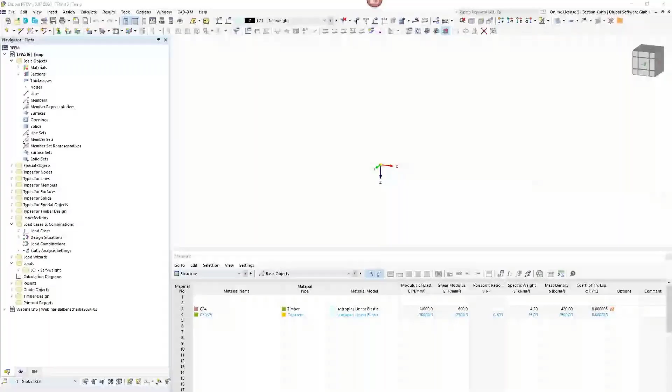Just have to get the right one. This one's right screen. Oh, I have to click share. Sorry. Yeah, looks quite good.

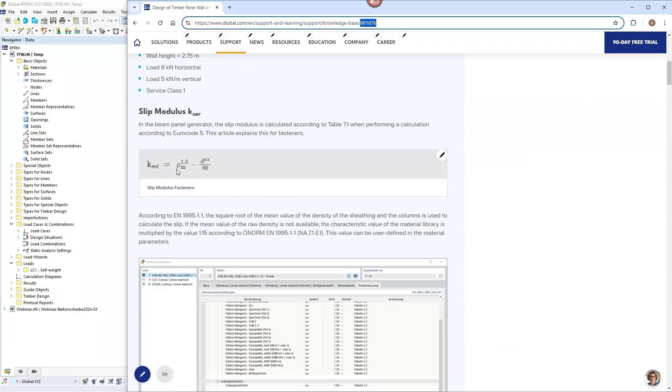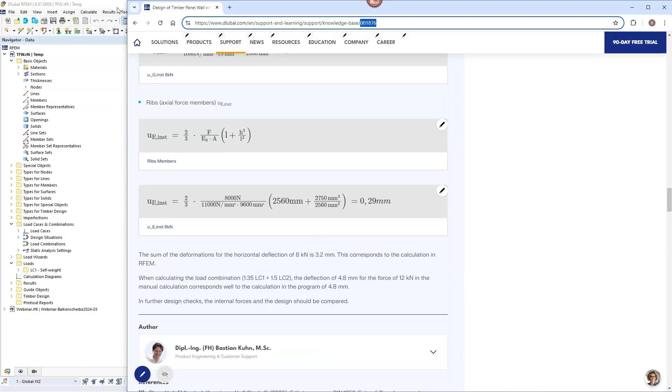Before I start the modeling of this timber frame wall, just as information for you, my colleague will probably share the link also with you. The model I'm doing here has been analyzed and calculated also by hand on our knowledge base. You can find it by the number 001876. There you can see the formulas that are lying behind it, and also the deformation, and of course the inner forces are calculated here with hand formulas or equations. Once I've generated the model, I will take a look back to the homepage just to show you what we are doing here.

Before we create the model, we have to give a model name, timber frame wall. I will choose type of model 3D here.

In RFEM 6, one of the advantages compared to RFEM 5 is that you have every design add-on completely integrated into the software, and it's not a separate add-on anymore. It's completely integrated into the software, which has a lot of advantages for speed and also design purposes.

So I can choose or decide what I want to build or plan here, and what we want to do in this first simple structure. I mentioned it already, we will create a beam panel. Therefore we would need the multi-layer surfaces add-on. We don't need the load wizard. We also don't really need the combination wizard, but it does not matter, and we will do the timber design in the timber design add-on.

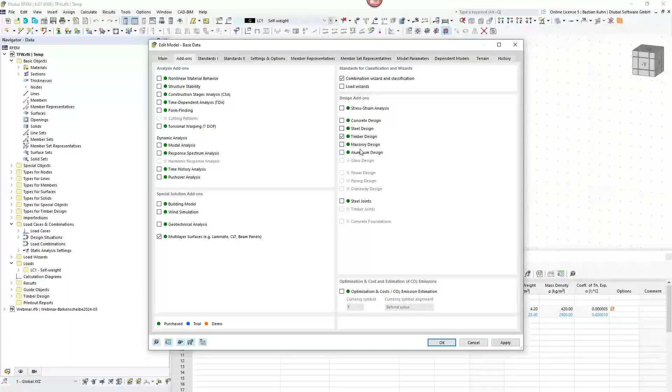Looking for the third register in the basic data, we will have the standards here. We are calculating according to the timber Eurocode, and of course it is also possible to calculate according to the American standard, Canadian, and a whole bunch of others, even Chinese is possible for timber design.

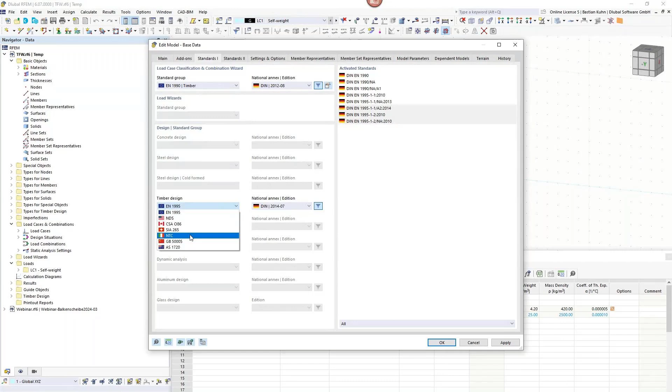I mentioned timber design. We will choose timber design with all the national annexes that are available for Europe, and it is quite similar for what is possible in America, Canada, Switzerland, Italy, because it has some special rules related to Eurocode, but a little bit different. There's also Chinese and Australian standards as well.

Okay, all the other options are not relevant for this quite simple model. We start and we will create the surface or the wall, and therefore we create a new thickness. For starting, similar to when you created a CLT wall or floor, cross-laminated timber, you can start with just a concrete material.

That's what I'm doing here. Any kind of thickness does not really matter, just create it for drawing the structure and how it's going to look like.

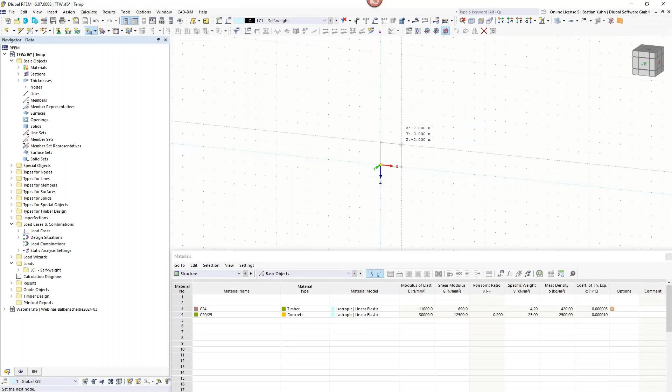So it has a size in X direction of minus 2.56 meters. This is now a theoretical example, and I chose this distance of 2.56 meters.

I can maybe also add a little dimension line just so that you see it here, maybe in the other area.

Of course, for timber frame walls, you have a standard distance of each beam in the panel of 0.625 meters, so 62.5 centimeters, which is the standard design.

In America, with the inches, it's a little bit different, but once again, we're doing this according to Eurocode. I will show how to change it also for the relevant parts of American standard, but the main purpose here is Eurocode. And just to get back to the homepage again.

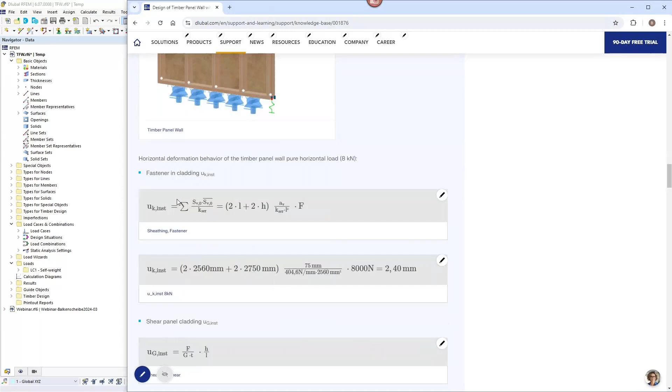Okay, and to see it maybe in this picture, a little bit moving - because of the distance here, I get exactly 5 beams side by side into this structure. Just an explanation in case you asked why I chose such a distance here.

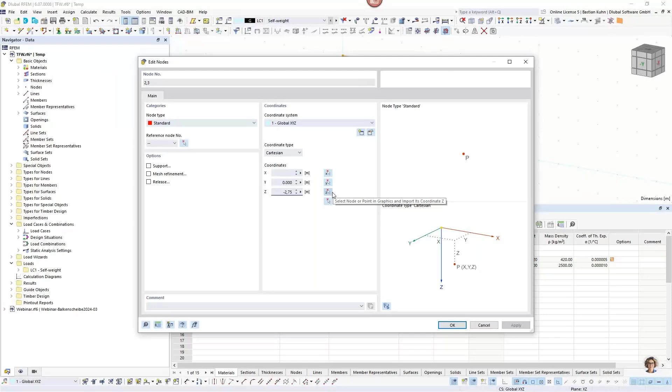Okay, I want the height also to be a more European standard value of minus 2.75.

Then I will add supports in it, and the first support should be not movable in X, Y, and Z direction, and also no turning, because in this case it's a 2D position. I will put that at the origin in order to keep it statically determined.

I will also just move one support on the right side. In the bigger model that I'm going to do just after this simple model, of course, you would do a complete support underneath the wall. That's for sure, it's just for this first example.

So this one is moving, and so that it's not flipping outside of the plane in Y direction, I will define it for the translational degree of freedom in UY direction.

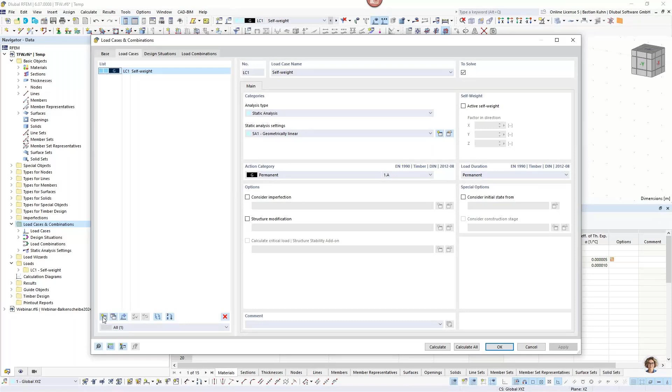Okay, I will put a line load for the first load case with a value of 5 kilonewton per meter, and go to load cases and combinations and create a new load case for the wind. I deactivated the self weight so it can be compared to the calculation by hand.

And here's the wind, and I'm directly assigning a load combination manually. That's what I mentioned at the start, that I don't even need the load combination wizard here, as I'm just typing it for this simple model. Once again, in the bigger example right after this, we use the combination wizard.

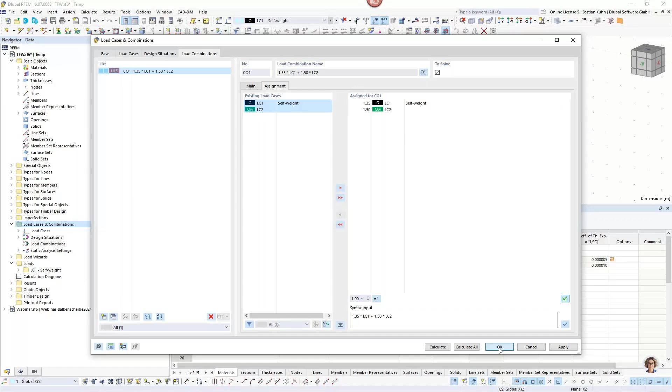Okay, just typed it all, and then it's there. So this is the combination that we are designing.

But of course, I forgot to define the horizontal load from the wind. This is going to be a force of 8 kilonewtons, and it goes in the X direction, minus, of course, because I want it moving this way.

Okay, but so far this is still a concrete wall, which we don't need. And how are we going to change it to a timber frame wall? We double click on the surface.

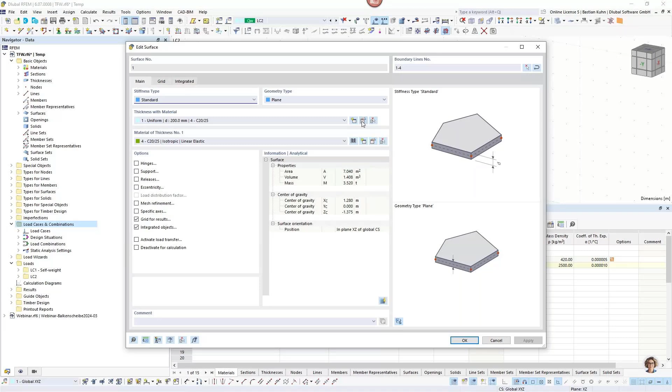And yes, we'll edit or create a new thickness. In this case, I'm choosing to edit this thickness. And now that I've activated the multi-layer add-on, I can choose the layers here.

If maybe I wanted it as a CLT wall, then I would have done it this way. But in this case, we want a beam panel, so that's the thickness type for the timber frame walls.

Not even pure timber frame walls - you will realize it when I'm in the material database via this library book here. So now it's predefined OSB according to either American, Canadian, or European standard.

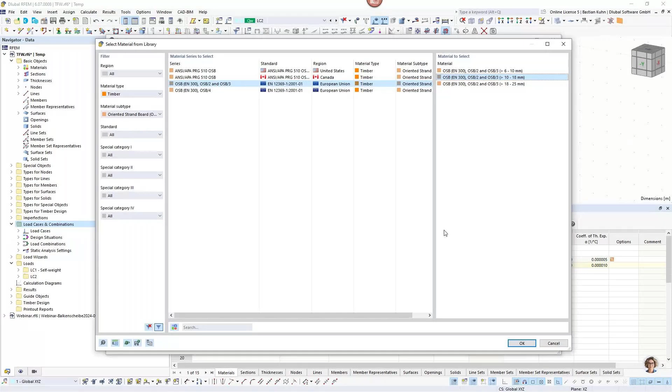For our example, we would use 10 to 18 millimeters OSB. But if you use the drop-down button here, you can also use gypsum, for example.

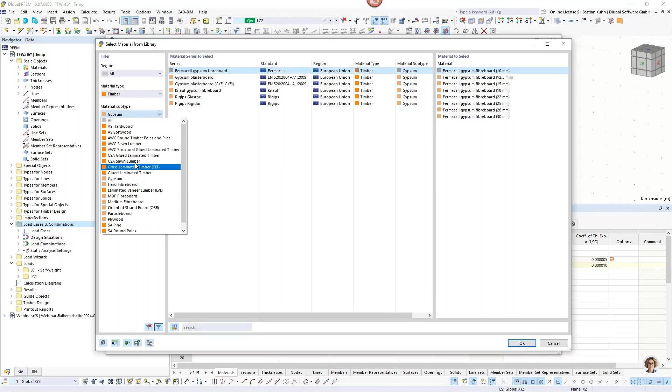Yeah, even for timber floors, at least here in Germany, what's used quite often are the Fermacell gypsum fiberboards in order to stiffen your structure. So that's quite an economic way of creating your walls. I just mentioned it here.

I would choose OSB. I can also show you, just as an imagination, how you would do it with the American standard. It works quite simple, similar to what you choose. I just haven't switched my dimensions to inch, so for me it's rather hard recalculating the 0.5 inch because thickness needs to be defined here additionally.

So this is what we will probably better be choosing by the European standard. We have to change the material into orthotropic for this type of thickness, and I will define 15 millimeter thickness in here. All right, so that's the sheeting.

I also can make the planking from both sides. I can vary it, so it can also be unsymmetric. I can even say the sheeting on the other side is made from a different material than OSB, for example if you are using some insulation material, and this has also some capacities for stiffening out your structure. So this would also be possible to be defined. So the material can be different on the front and back of your beam panel.

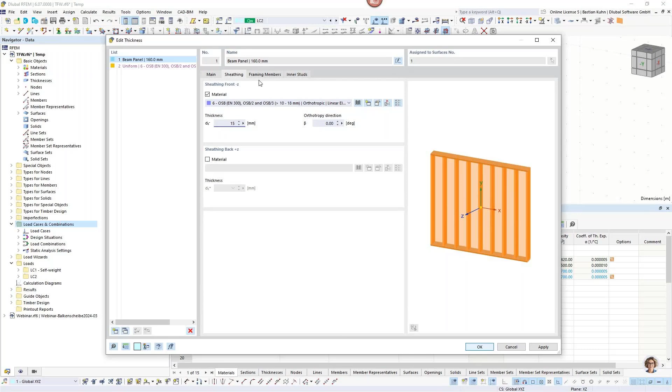Okay, so this leads us to the framing members. Here that's the usual material section database that you can choose here. Sensible, of course, is here only the rectangular one, but just as a notice, it is possible to choose and define any kind of section here.

It's just for this case I'm using a 6 centimeter by 16 centimeter board or beam inside, and this is the most standard way to do it, and that's what I'm going to do for this example. These special selections I will show in the bigger 3D model afterwards.

Then you choose the connection type. You can have nails, staples, or user-defined slip in here. And when we choose staples, for example, with the dimensions of 1.5 by 50 millimeters, you see that the stiffness is already calculated in here. We're choosing a spacing of 75 millimeters.

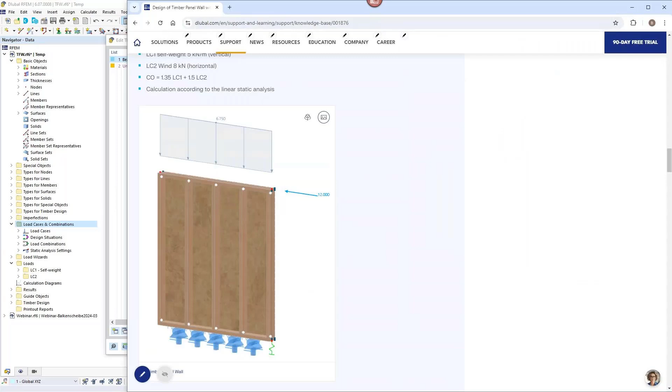And when we compare it, I hope it's the last time I'm switching to the homepage. If you look into this here, you see how this equation, or how these values, are calculated in here, so with the slip modulus from the mean value of the beams and the planking. Okay, so this gives this value.

It would also be possible to consider the connector stiffness just in one direction, so then you have it just in the X direction and the Y direction will be 0. I will also show what that means in the generated beam panel. So that's an important info that you should remember once we've generated the beam panel.

So the point I'm showing you here is this is a generator to generate the timber frame wall in the big program RFEM.

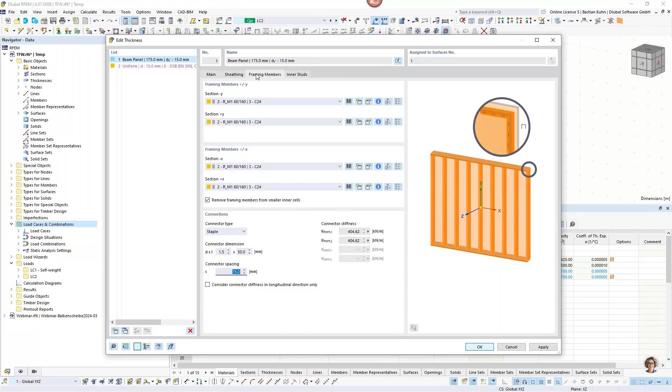Okay, then we have the inner studs in here. Then you can have several, well, you can have other sections in here. That's similar to what I showed you when I was working in the framing members. It counts here vice versa.

You can have here IPE profiles if you want. For example, if you have a very high vertical load and you say, okay, in one special part of it I want an IPE, then you can say create any distance in here, 1000 millimeters for example, and create an IPE.

So that would be possible to also be defined. All right, but here, for this example, we are choosing center to center and the spacing that I already mentioned, 625. This offset and what it makes, I will also show in the bigger model afterwards.

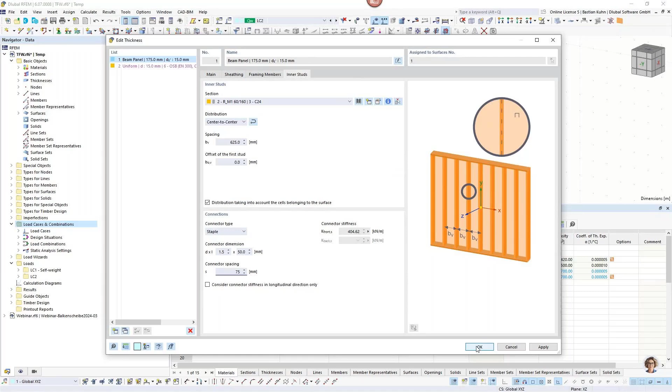Okay, but what I'm choosing, similar to the definition before, is 1.5 and 50 in here, and the connector spacing of 75 millimeters. So then I press OK, and one more time OK. So nothing's changed. Surprise. Why is nothing changing so far?

The answer is because I have not shown the beam panel. What we want, or what our idea is from creating the beam panel, or for developing the beam panel, is that you work with, as you are keen to it, as you know it, with surfaces, and then inside it you generate the beam panel.

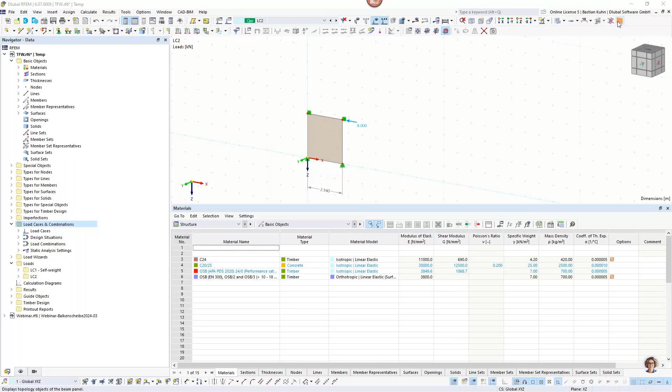And when you now activate the beam panel, you can see that it's generated in here. So here is the beam, top beam and the bottom beam, and also the posts. So we have 5 posts in here, but that's obvious because of our distance. I maybe can switch on photorealistic visibility a little bit, just to give you a better imagination of what it's doing.

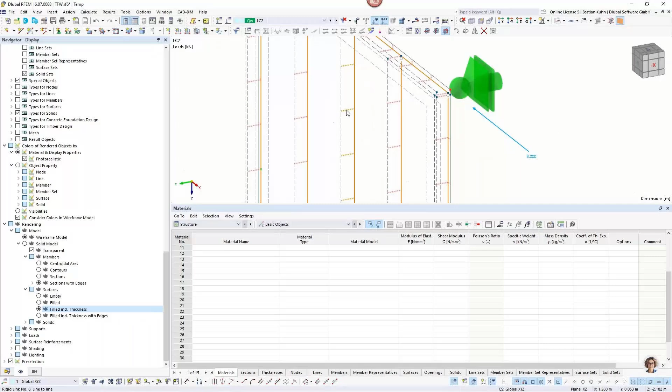I hope that can be seen this way. You see the OSB is eccentric, moved to the outside. It is connected with these little pins in here, which represent the staples that we have in there. When we double click on one of those pins, you can see that there's a rigid link defined, and it contains the stiffness that we generated in the beam panel.

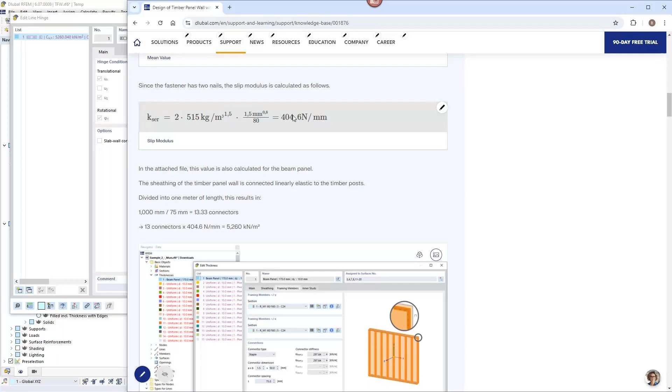I promise not to show the homepage anymore, but I do it just one more time because it's good to have it seen in here. If you remember, I had defined a spacing of 75 millimeters, and this is calculated on 1 meter, which gives you 13 connectors. 13 connectors via the calculated slip modulus gives us this value in here. So this is done here. And I also told you that we should remember this longitudinal stiffness, where if I had chosen just to have the stiffness in UX direction, my UZ value would be 0 in here. So that would also be possible.

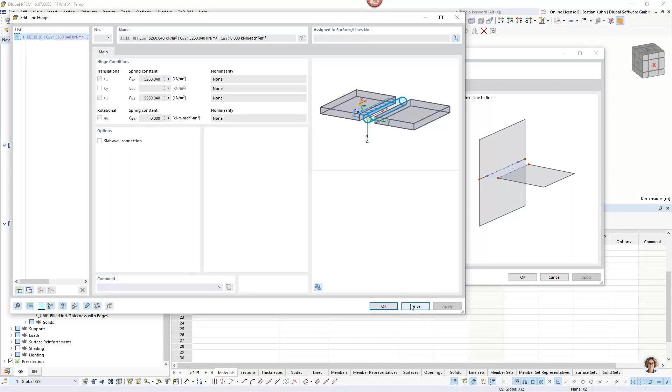Okay, this is the generated hinge there, and it's generated once again between each beam and the OSB planking. I will put on the rendering again. So here this way, it's probably a better visibility. Okay, so now we want to see results of it, of course.

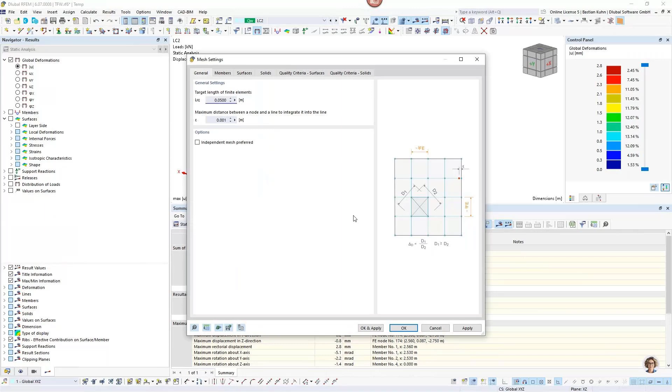I did not mention the FE mesh. That is something we should have maybe looked at before, but we can calculate it once again. I will get the rendering off, and you see that the FE mesh in this case is nonsense. So we have to go back to the FE mesh, make it a little bit finer with 5 centimeters, which is maybe too fine, but for this example I think we can do it just to compare our deformations and inner forces.

And maybe also the reaction forces, because actio should be reactio. That's what I learned in my studies. All right, so you see that the FE mesh is now fine. Maybe too fine, but it's good. We will leave it this way.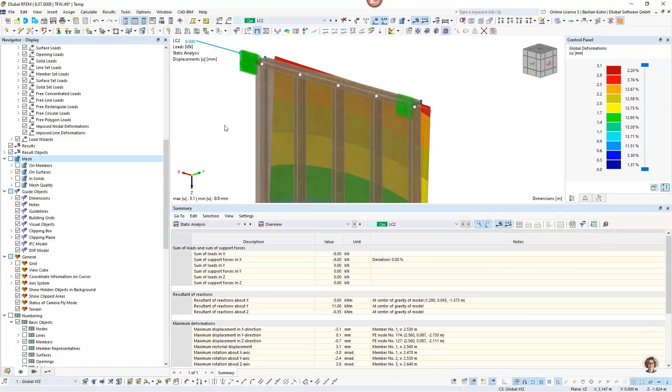And we have a deformation of 3.1 millimeter, and reaction forces, yeah, actio, reactio, that works. We have a little bit, because of the eccentricity, small forces here, but I think they can be ignored in this case, which gives us a little bit of changing inner forces, but not that much. Yeah, this is the deformation that you would also calculate by hand for this simple formula. And then now it's actually done. You have the stiffness correctly assigned, so that's all working.

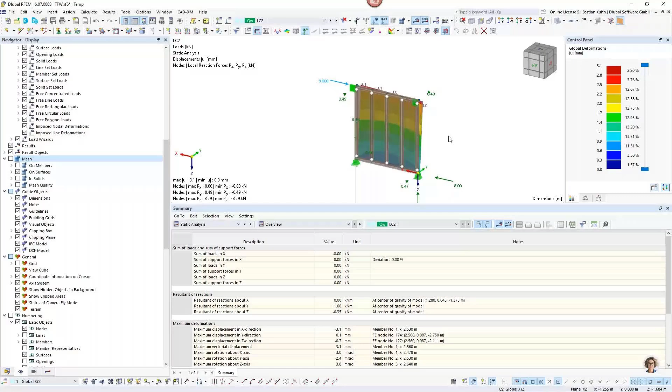Of course, we did not design the timber frame wall. So how would you design the timber frame wall? Then this I can also show you via our new, well it's not new, but in RFEM 6 it's new, the so-called member representative. So if I'm choosing here member representative for the posts, and what do you verify for the post?

The buckling, of course. Then you would say, and the advantage of the member representative, in case you have not worked with this in RFEM 6 and do not know this, is in former times you would have to choose all the posts and edit them and work on them. And this is now not necessary with the member representative, because every member that is similar to the other one, which is the case for posts in timber frame walls, can be summarized in the member representative. So you just do it once, and in former times you did it several times. This is one of the good advantages.

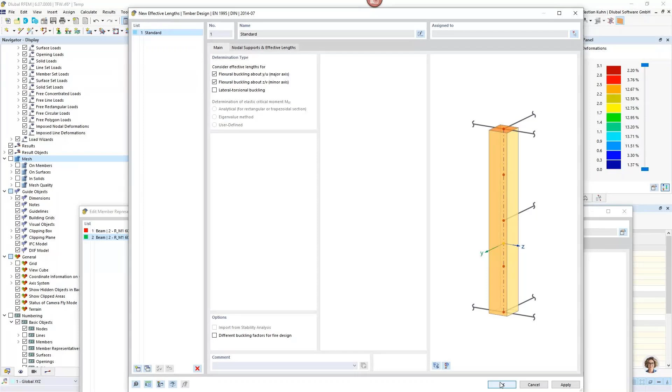And then, of course, effective lengths - what we do not verify is lateral torsional buckling. We even do not need to verify the buckling about the minor axis, because that is covered by the planking or by the sheeting. But yeah, just for sake of completeness, we are verifying it.

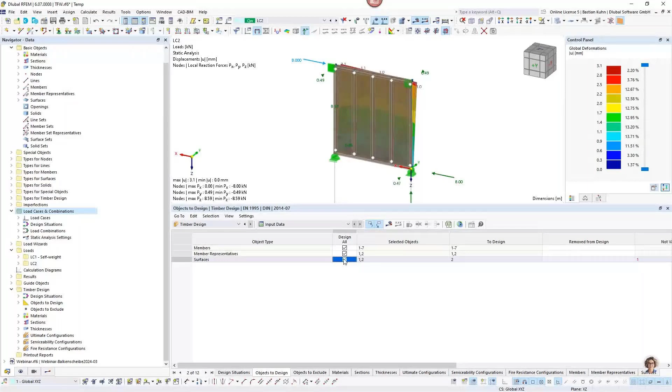So that's member representative 2. And then we calculate it and look for the results. As I said, what we want to verify here is buckling.

Pressure against lateral to the grain for the downstand beam is also possible, but it requires the definition of an additional beam. That's why I'm skipping this here, just as information in case you ask yourself this question. Okay, you see stability works in both directions, and I want to show you that the verifications are done, and we're very proud about how these verifications are shown now.

Here you see that all the equations are there with nicely written formulas, and of course you get the slenderness ratio and the buckling factors, and this can directly be put into the printout report as your documentation of the results you calculated for the posts.

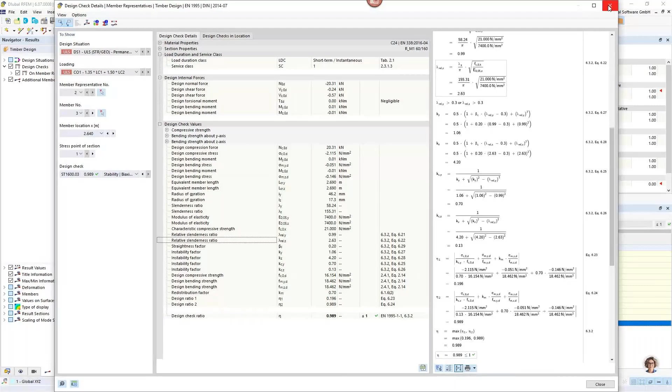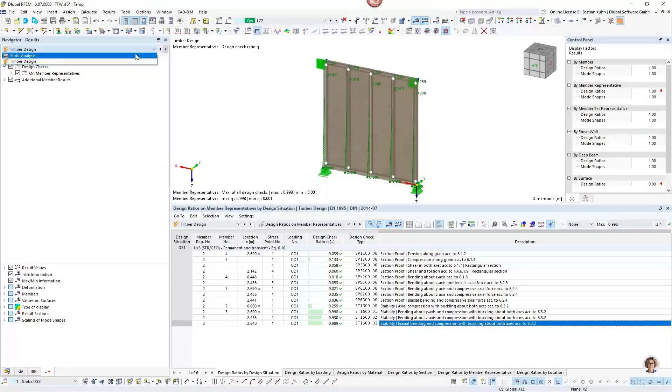Okay, the connections inside it is something which is also the most important verification. It must be done by hand, but there are methods and ways that help you to calculate that.

And you can take a look into navigator results, static analysis, releases, and then line hinges and forces. So usually the value that you need - we'll switch off this one and also the rendering once again.

So you see in here, well, in the middle there's nearly nothing happening, and it's rather a constant value. So when you are very much on the safe side, you would calculate your load bearing capacity of your staples in this case, and compare them with a value of 3 kilonewton per meter, or you could also take the middle value of it.

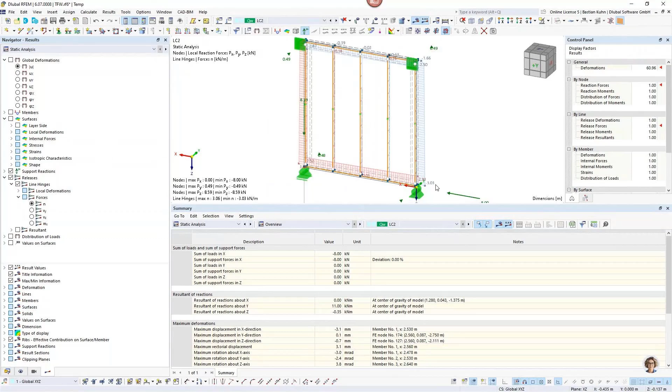This is what the software gives you, and we're working also on designing them. Of course, this will also be possible quite soon.

Okay, this is the simple model. In case there are no questions unanswered...

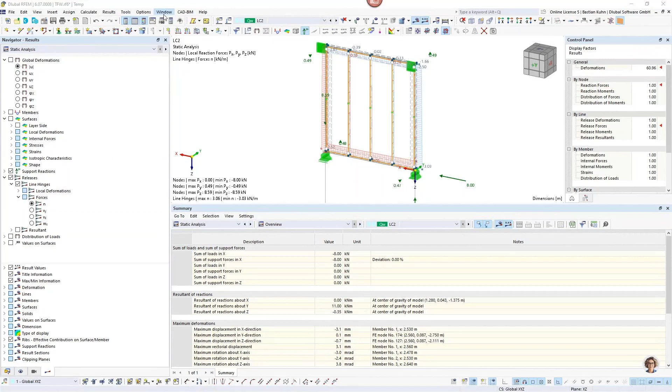There is a question: what about the possibility to add openings? Yes, that's what I'm showing you now in the bigger model. So that's a good question and leads us to the bigger model. Therefore, I'm closing this and switching to the bigger model.

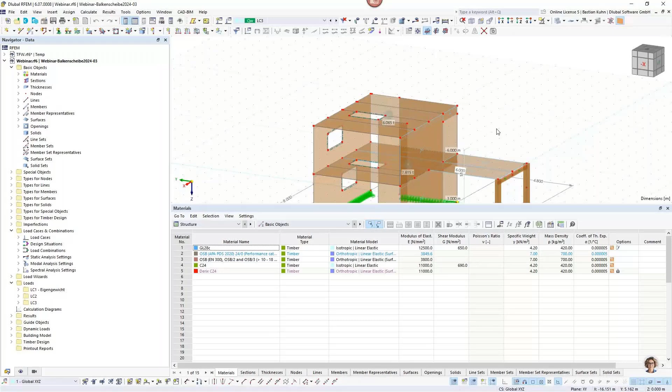It is a house that I probably have shown here for 10 years or something like that, I think. So if you take a look at the historic structures, this is something I probably showed 10, 15 times here already.

It is completely made from CLT. Here it has a little balcony. It has a length of 6 meters, width of 10.8 if you include the balcony outside it.

All the CLT plates are connected with hinges in here, and also on the wall they are connected with it - not the surface. I wanted to take a look at the line hinge.

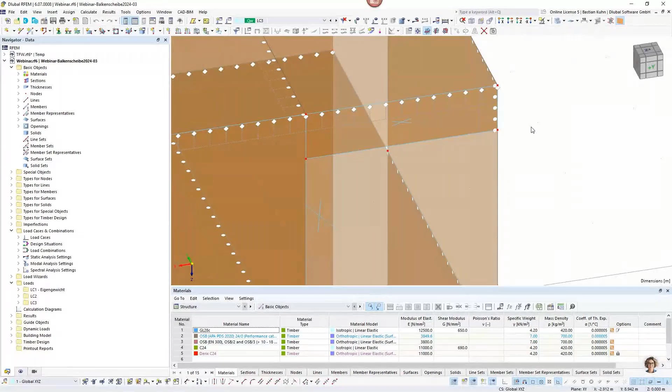Here's one here. Okay, so there should actually also be a slip in X direction, and it's similar to what I showed you in the smaller model before. Then you get the forces in the line hinge and have to compare them with the load bearing capacity.

Okay, so now this CLT building has openings here, of course, and I want to change maybe this wall and also this inner wall into a timber frame wall.

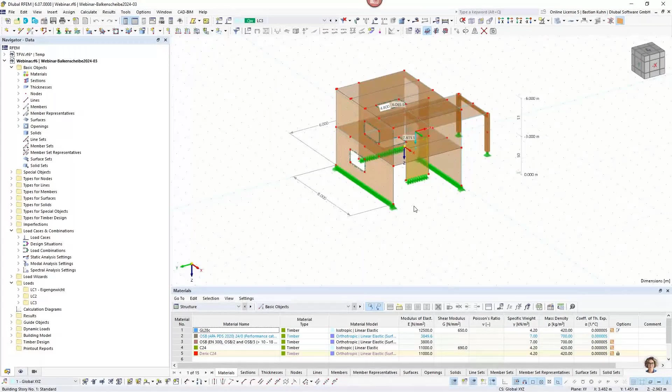Before doing this, what you would have to do in order to regard the opening is to separate this surface into several surface cells. And for this, we have a new function here called extend trim line to next member line.

So we say okay, and then you see that it's divided here, and I now have these surface cells. Surface cells are quite a new object in our software, which are useful across a whole bunch of elements in the software. And we are using it now also for the beam panel.

You probably know that, at least when working according to Eurocode, that for timber frame walls there is a simplified approach according to chapter 9.2.4.2 or something like that - don't quote me, I'm not 100% sure which chapter it is, but it's 9.2.4 something. And this is for a hand calculation.

And what would you do when you calculate such a structure by hand? You would calculate your horizontal force, and then you would say, okay, this surface cell will bear this horizontal force, and this surface cell will bear that, and I need hinges here and here at this point, and I'm totally skipping the elements in here.

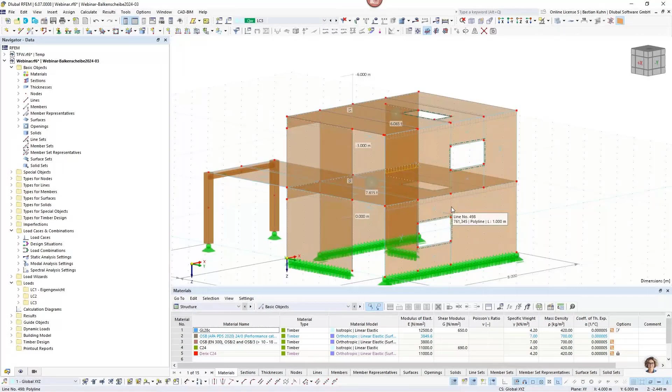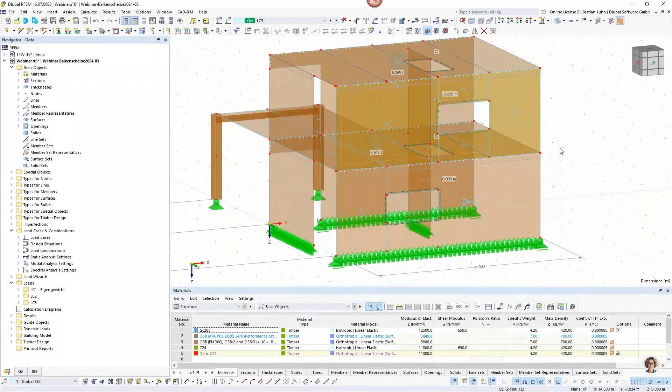Maybe what I could do is delete this one and divide the surface, the bottom surface, at one point, just to show you what you can do regarding slip and what you cannot do, and where the difference is compared to the top, where I'm still having one continuous surface. So I go right click and say divide surface with intersecting lines, and now it is divided. I'm just doing it on one side for demonstration purposes.

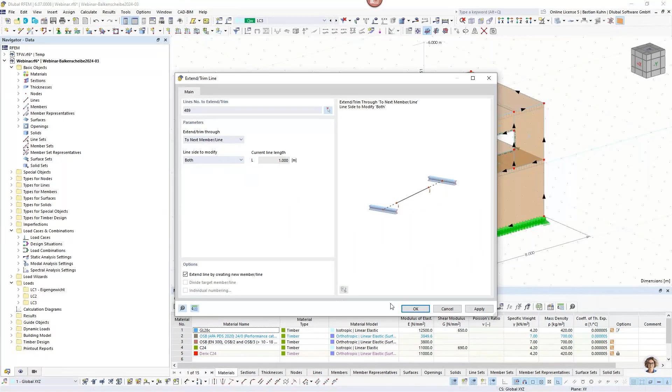So extend via copying, leaving the cells here. I'm quite curious what's coming out of this, because I've never tested it before.

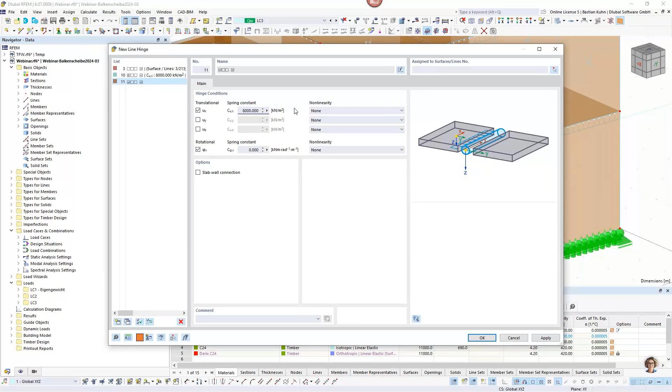And I will insert now an object line hinge dialog box, give it my favorite slip of 8,000 kilonewton per square meter, and say okay, here and here. Now I'm having the slip. That's quite similar to what I've done here on the walls, on the CLT walls. Sorry, okay, I forgot to mention the load, by the way.

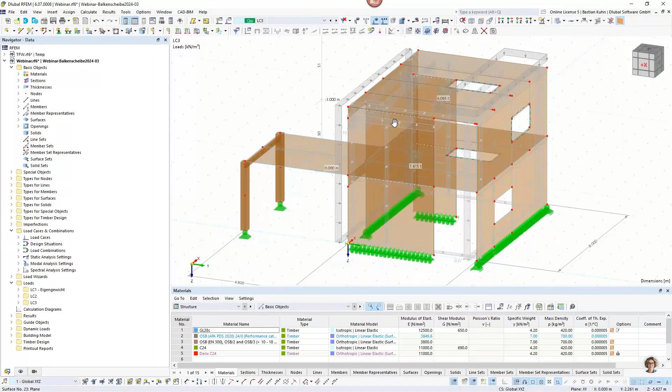So we have self weight here, quite simple, 1 kilonewton per square meter over the complete balcony. In load case 2, I have 1.5 kilonewton per square meter. In load case 3, I have generated wind load blowing on the building from this side, from the front. That's where I'm stiffening my structure, just for your information. And of course, I choose an automatic load combination and generate all these load combinations that we are using here. Okay, so a lot of words I said.

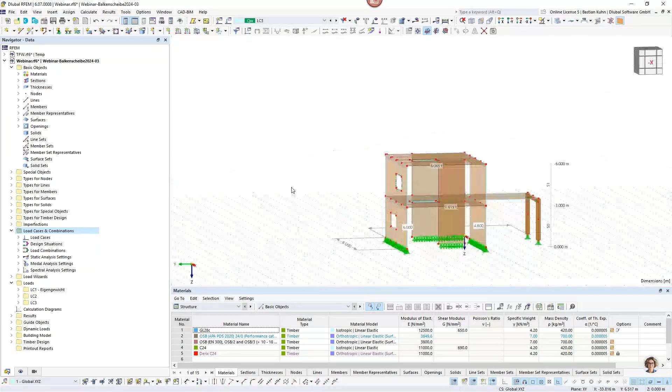Now I can go and display our relevant walls, these ones, and go here into the selection and define edit surface, choosing the beam panel we just defined.

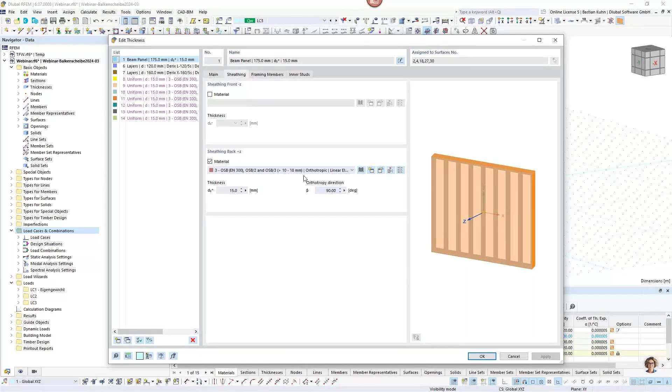I will go to the dialog box. Just once again, I've changed the sheathing on the other side, but it is quite similar to what we've done before. Framing members are the same, and oops, sorry.

We're using staples, and I'm keeping now the removing framing members, and also the distribution, and this offset here is 0. So then I'm generating it and press OK.

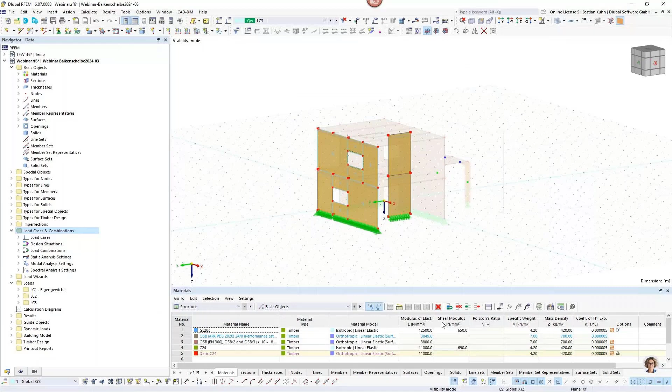And then you see that this one is generated here. This one's not there - was a small problem. Sorry, it's not working because I have not divided it. I said I would be curious what's happening because I never tried it. I probably should have tried it. Then this would not have happened.

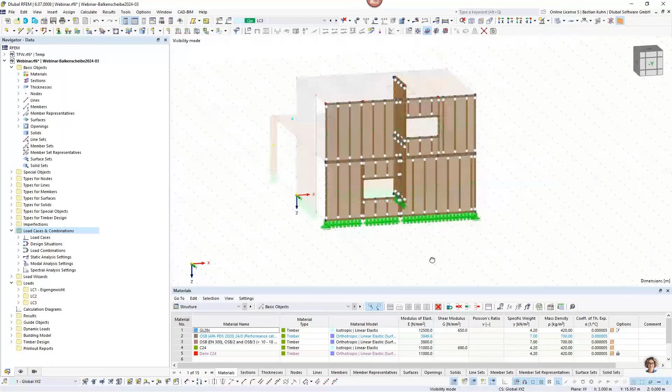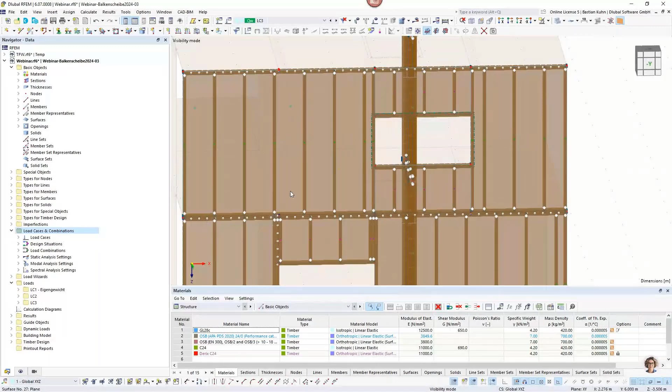But anyway, okay, so now we look at the top floor, the top wall first, and we see that the distribution of the beams of the post is quite good. We would calculate the opening, and it kept our spacings of 625 millimeters in between, and here we have a middle value of 100 millimeters left, which is also good because we can still get insulation into it.

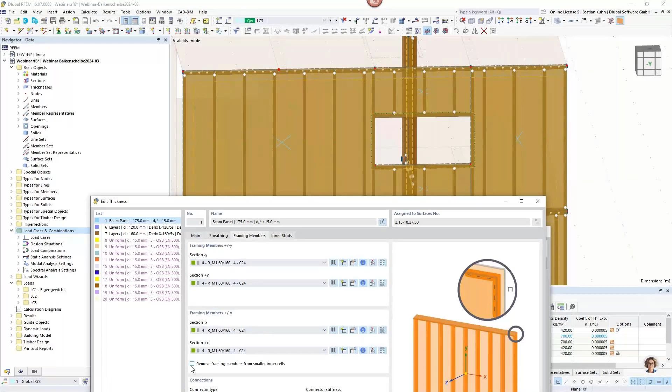But yeah, I said it - what I wanted to show you is what these special selections do here. So if you remember, this post is coming down here, and if you do not use the remove framing members from smaller inner cells option, choosing apply here, then you would see - I hope it can be seen because it's highlighted now - there's an additional post which makes no sense. So this is actually what this selection does here.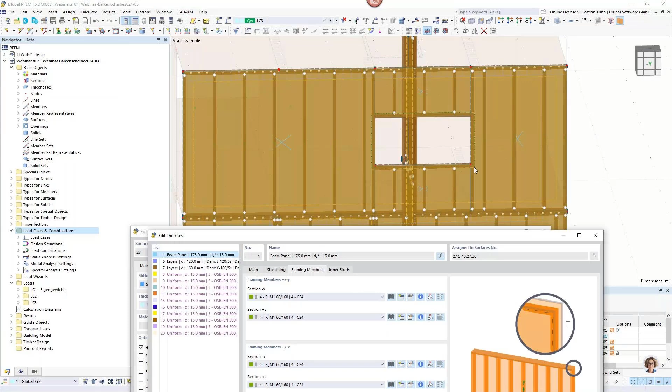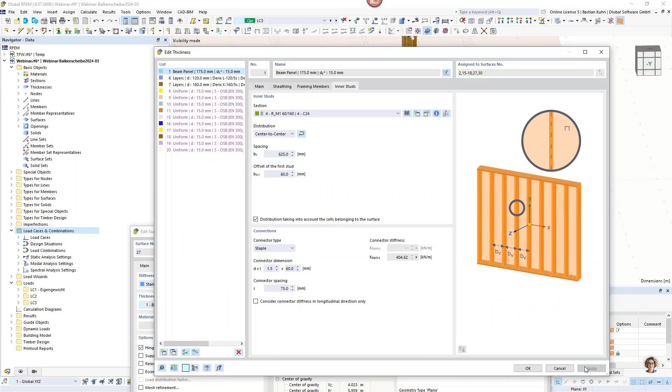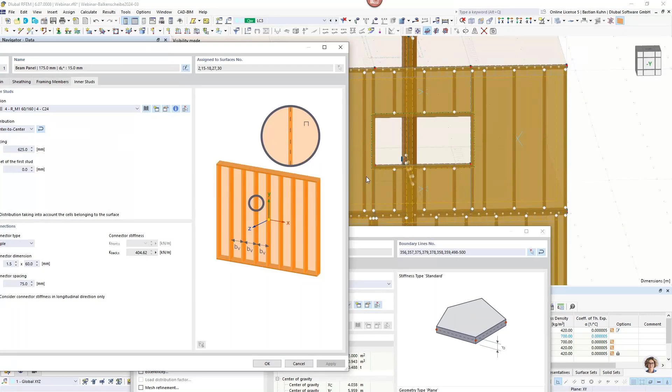In case it doesn't fit, or you want a bigger distance, you can use this offset for the first stud. I don't think it makes sense here, but if you want, you can choose it, moving the first stud by 6 centimeters. Let me show you - we go apply. So you see here I have now 6 centimeters less, and then I can put more insulation. This is how this works and how you can assign that.

Now, when we talk about openings, the point is - in Europe, I don't know how it is all over the world, but we have special rules for what you can do on bigger openings. Maybe you also have a complete door going to the bottom, or a balcony on this side - you can imagine 100 variations of it.

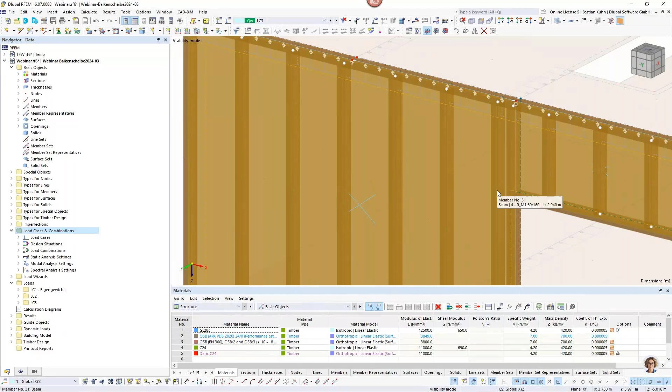What we do here in Europe is use the top beam on this window and move it to the next stud. That's one of the possible constructions, and then it's a complete shear stiff wall, nailed on every part wherever our OSB plates connect or come together, and there's always a beam or post behind it where it can be nailed on.

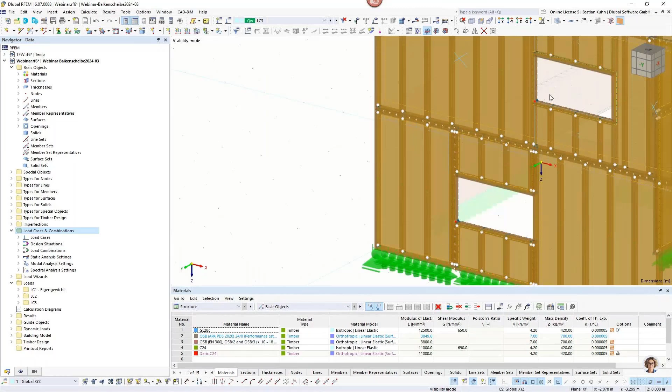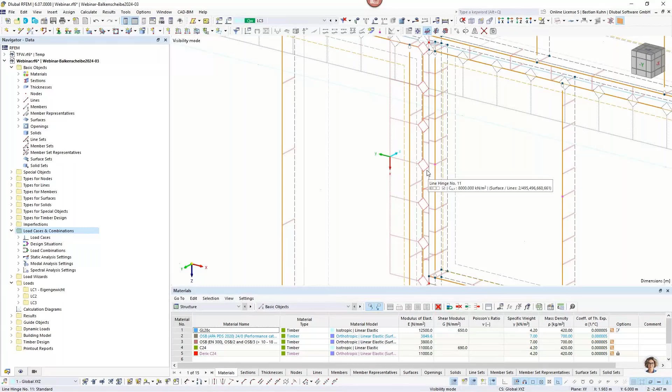That's for sure, or what I did here in the bottom, which I mentioned from the start - if you want, you can connect the beams and have a slip in between. So the slip is what I showed you in the first example, between the OSB and the post, and between those two timber frame walls. That's how it can be connected.

It's maybe a little hard to explain, but after the webinar, download the model and take a look - then I think it should be quite easy to understand. Why is it not calculating?

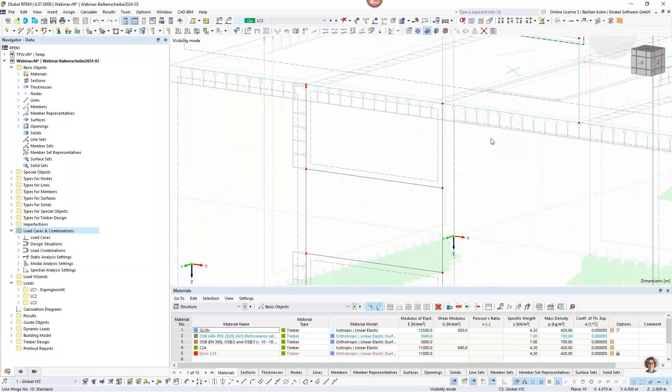Just hold on, we necessarily don't need - that's strange, okay wait, maybe I will not get it going. Hold on, we will get rid of this. Maybe we will not divide it. Go in here, because maybe this was the reason for it.

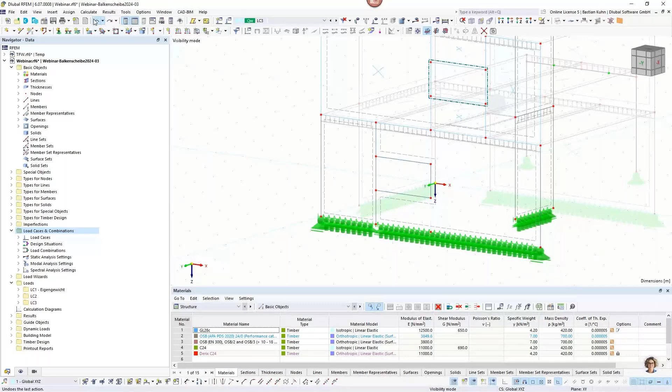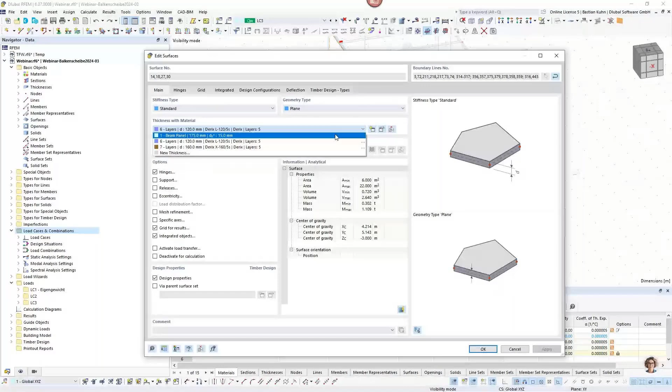Okay yes, I know it's still intersecting. So in here, and now if we do it again - oops, too quick, sorry. Up and here, edit, and choose again the beam panel.

Why is that now? Ah, so I forgot this one. Okay, so we need to extend here - one more try, otherwise I will leave you without the results of it. But I think it can work. Yeah, should be.

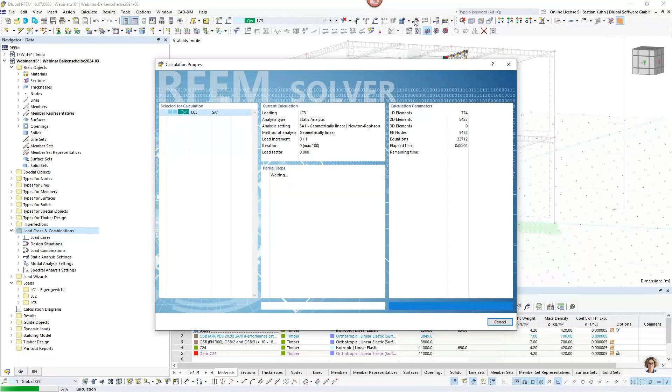Okay, it's not a real small structure, not even a big structure, but yeah. I also use the building model inside just to get my masses all around, so masses maybe also a good point. One other advantage of using such a 3D object is that you can use the stiffness of the timber frame wall similar to CLT for every calculation, so also for your dynamic analysis, you can create response vectors and use it for this.

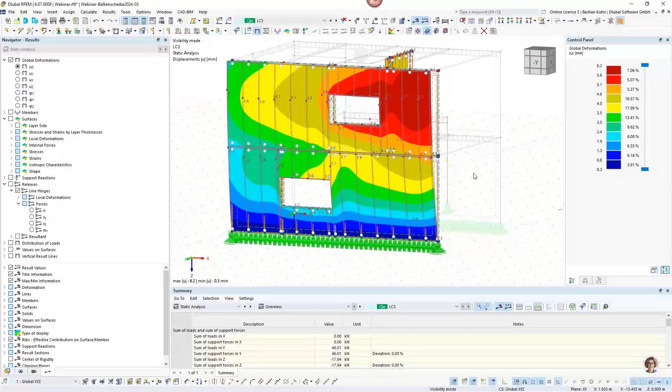You see in here, this is now quite similar to what we have before - we have the deformation, the inner forces of the beams, and can do the verification on it. Okay, that's it, that's all I wanted to show you.

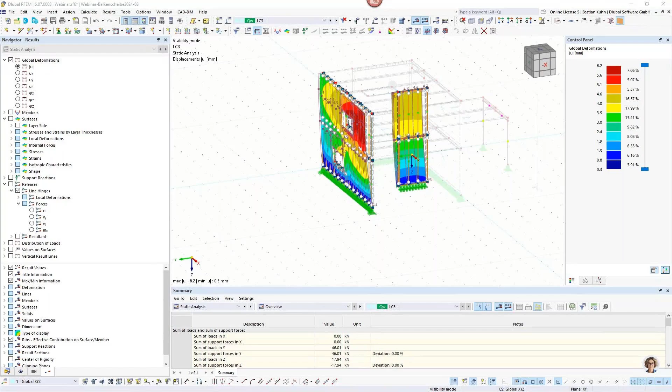Quite a short webinar, I think, but 43 minutes was not that short. I hope my colleague was able to answer all your questions. I'm not so sure - maybe Andreas, do you have something open I should mention? No, I answered quite all the questions. Good, maybe there are newer questions when I take over - maybe you can answer the rest. Okay, I share my screen.